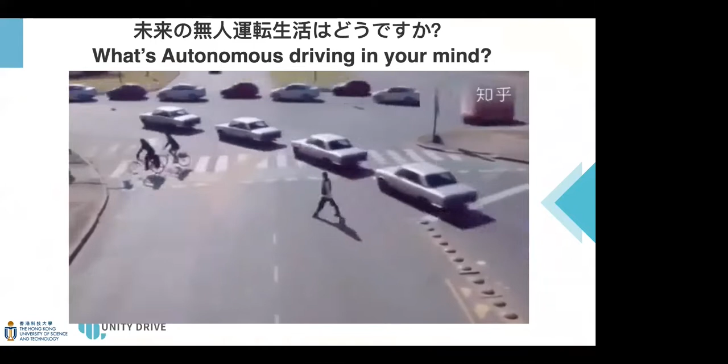When we talk about autonomous driving, basically everyone will have a kind of image or expectation of the future. It's definitely not something like a technical term, they will have an image, probably like the video we show here on the screen. The autonomous driving vehicles can coordinate with each other and everything moves totally safely, with no accidents, and all the planning and motion of the vehicles are well planned. So that's probably what you can expect, or what you want to imagine about the future life.

Our research on autonomous driving actually goes along with that direction. In the past 10 years, we have been working on the first autonomous car in Europe. We also worked on the first autonomous driving bus in China, and we developed the first autonomous driving vehicle in Hong Kong, as well as the first autonomous driving boat in Hong Kong.

Nowadays we found that autonomous logistics would be one of the main driving forces before the so-called L4 level, meaning the fully autonomous level of high-speed autonomous driving. There must be something else, which we call low-speed driving technology, that will be used mostly for last mile delivery, security and surveillance, and also warehouse usage. That's based on the large amount of needs and the increment of the requirement for logistics.

It has been reported by these big players, especially the e-commerce players, that in 3 to 5 years, every day probably it's like this Double 11 festival. This is very special in China - that's everybody will do some e-shopping on that day. Last year, the orders per day already went over 1 billion packages that need to be sent out.

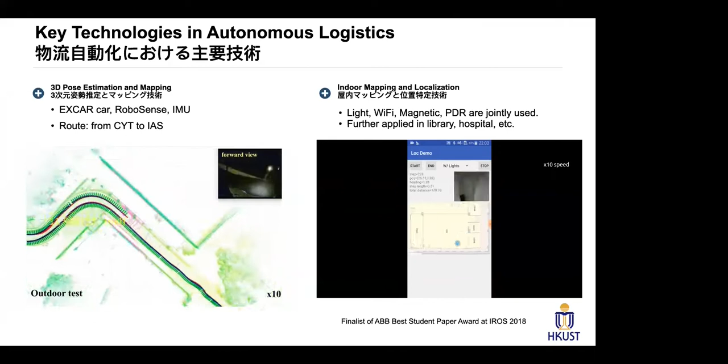That includes several aspects, including 3D pose estimation and mapping. That means the robot needs to know where it is, like an autonomous vehicle needs to know where it is - not only outdoor, but also indoor. We need indoor mapping and localization technology for package delivery logistics.

Also, we need to test the system in more realistic environments, including 3D mapping of more complex scenarios. So that means we need a bunch of engineering modules, including the data logging system and the human-machine interface, so-called HMI. Based on these, we develop the core modules for autonomous driving.

So I will give you several examples of the technology context. Firstly, from perception, we need to work on so-called 3D navigation, visual navigation, and real-time perception, so that you know how the 3D world looks like. Then the car can navigate around not only by LiDAR, but also by the camera system, and can detect obstacles in real time to see what happens in real life.

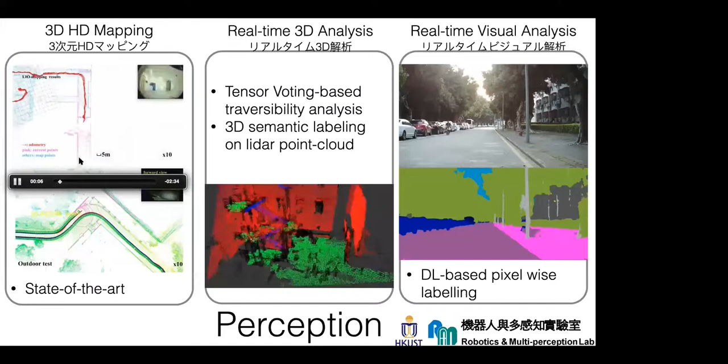We already got several awards along this direction in the past. More specifically, when we create this 3D map, we can even use some handheld device - we move around in the environment and it generates the 3D map on the fly in real time. Then we have 3D analysis of the environment, not only from LiDAR data but also from visual data, as shown on the right side.

Every picture will be converted - or we learn from the picture - so that every pixel is labeled with different semantic meanings. Finally, when the car is moving on the street or in confined areas, using both the camera and the LiDAR, we can have a better understanding of the environment.

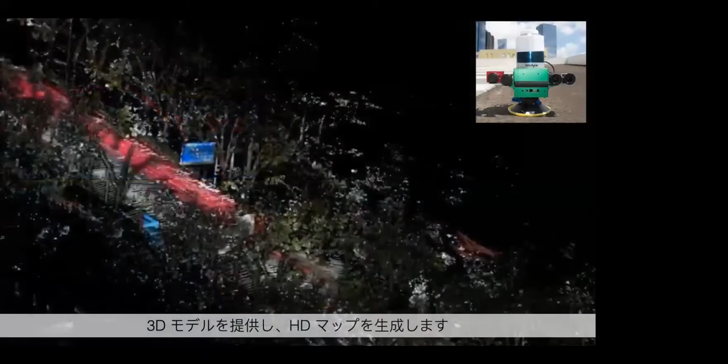Another thing is that we generate a 3D representation of the environment. So when we take this sensor set, shown top right, and put it on top of the car, and drive around a city area, it will construct a 3D representation of the environment in real time.

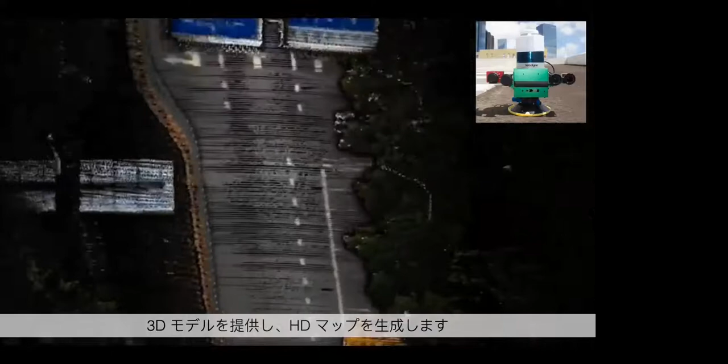In the video, you can see the 3D model we created, which can also serve not only autonomous driving but also smart city projects.

Because we have so much content, I will accelerate a little bit. So based on what we get from perception, we need to also work on decision making - that means knowing when to stop the car, when to accelerate, when to do a detour.

And we first test everything in a simulation. This simulation can simulate different kinds of weather, different seasons, different times of day. So in every experiment, we can change the background weather and other situations freely, so during one test, you can see cases where even we are on green lights and others are breaking red lights, and we can simulate such cases.

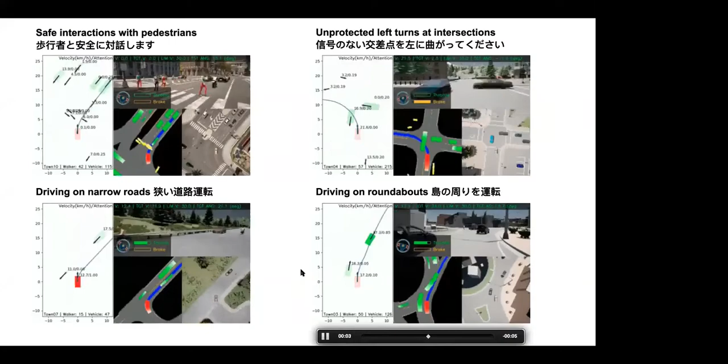For the planning and execution, I will skip this part, but we should know it's all supported by other sensors, as well as different computing units, and also supported by the car body design and construction. Here you can see that we also put testing environments in place.

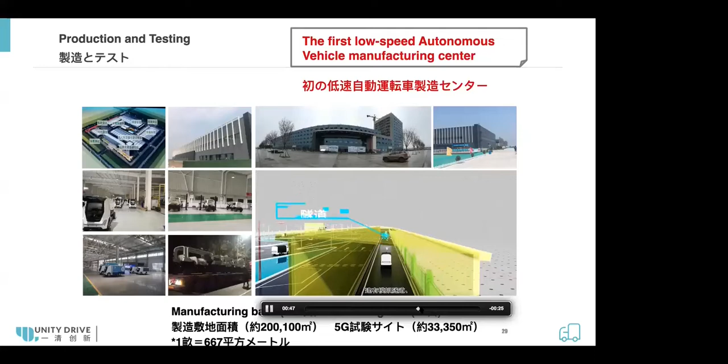We also construct testing environments so that we can do experiments under a 5G supported environment, so that we can handle the complexity of different special environments.

When we put this in use, there are several application domains. For example, this is a last mile delivery system. We collaborated with SF Express, so their postman can use a cell phone to call an autonomous driving car to help with last mile delivery. The car can be ordered to different dedicated locations and will come and wait, so when the postman gets the packages, they can directly put the package on the car, keep working with the customer, and all the delivery will be handled by this autonomous vehicle.

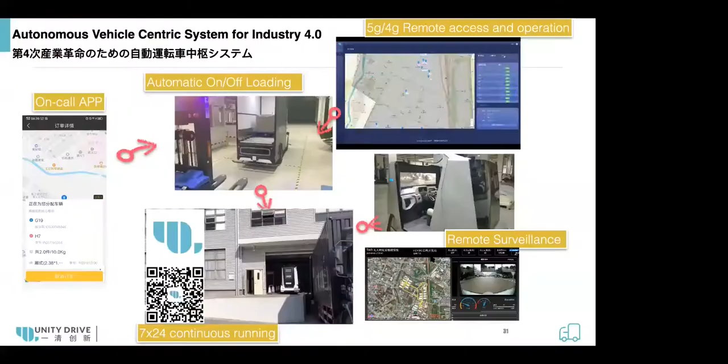And that's also helped the so-called fourth industrial revolution. We have an automated on-off loading system, a continuous running logistic system, and a remote surveillance system to connect with the ERP and WMS systems, etc.

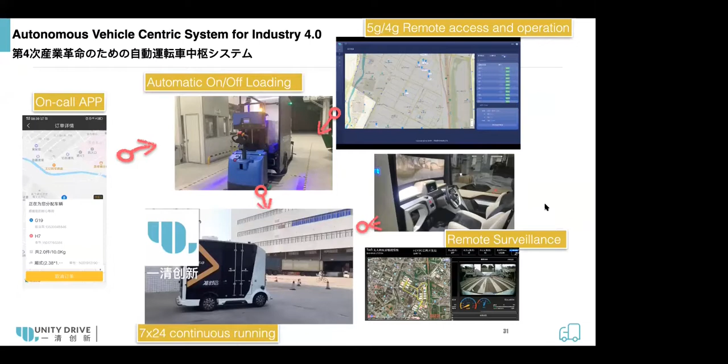And we have a sizing, you can call that a golf cart, and we have multiple vehicles collaborating so that it can serve the sightseeing purpose at different landscapes and locations.

And we can also use that for food and package last mile delivery. When we put an order in a park, the vehicle will help fetch the food and packages from the shop, and then it will deliver to the final customer. Everything will be handled by an autonomous car without any driver on board.

We have been testing this system over the past 3 years, especially for low-speed driving in different weather conditions, etc., with extended applications in different areas. Here is a list of vehicles we have been trying and working on.

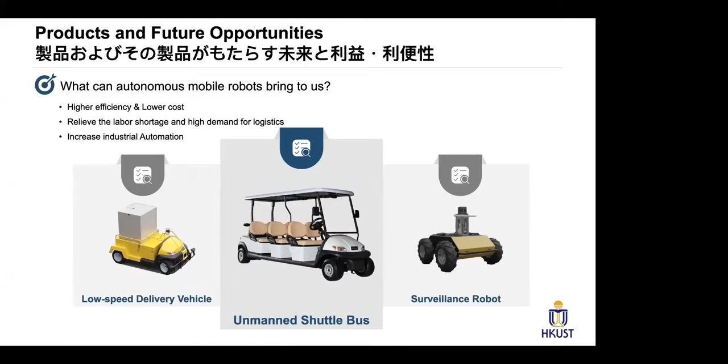Our last message is about products and future opportunities: the low-speed vehicle can actually facilitate our life a lot. That's what autonomous mobile robots can bring to us. But one consideration is the cost. From millions of US dollars cost to 100,000 Hong Kong dollars, we are almost there.

From that, HKUST, we are now establishing several sub-organizations to conduct this kind of research, ranging from the IADC, which I'm leading, to several spin-off companies like Unity Drive Innovation and LIC, etc.

So, here's the last page. At the beginning, we talked about the innovations of the future autonomous driving life, and when we really put the autonomous vehicle onto the working side, you can see that people are getting very curious about the car to see whether it will stop. This was around January 2019, when we first put the car onto the industrial park and everybody was quite curious. But by the end of 2019, everybody is quite used to this car just moving around without any driver on board. It takes some time for the whole society to accept that the autonomous system is really helping and the future is coming.

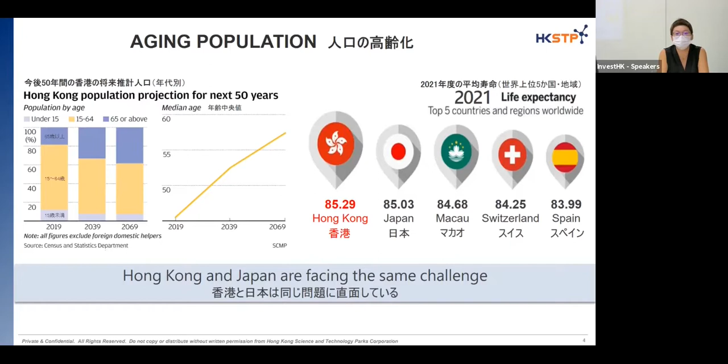The problem for us is that the workforce is decreasing. Right now it's about 1.12 million people over 60 in 2015, but by 2034 it will become 2.28 million, about 1/4 of the Hong Kong population. So we could easily foresee that most of the skillful workers are approaching retiring age soon.

So these are the driving forces and the key reasons why we need to bring up certain new technology such as automation and robotics.

Some case sharing - the logistics industry is still one of the key industries in Hong Kong. For the traditional operation, it is highly labor intensive, and we have lots of stationary machinery which requires skillful workers to operate. But the impact is that the whole process becomes inefficient and expensive, and it's not easy to scale up, relying heavily on the labor we could find in the market.

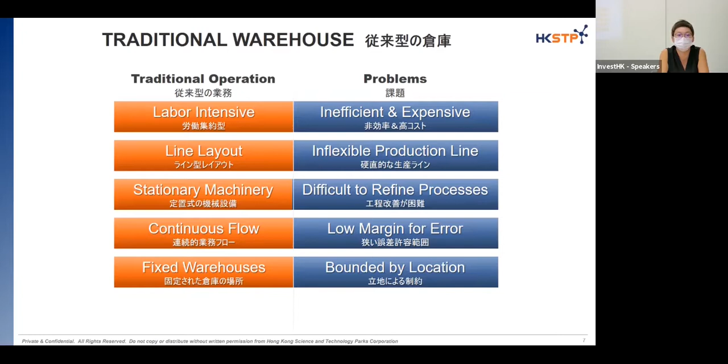Recently we have one good company from China called Geek+. This is one of the biggest logistics smart warehouse companies in China, working on a lot of different kinds of robotics to help automate warehouse solutions. The reason Geek+ would consider Hong Kong is because they would like to go out to the global market through Hong Kong as a stepping stone.

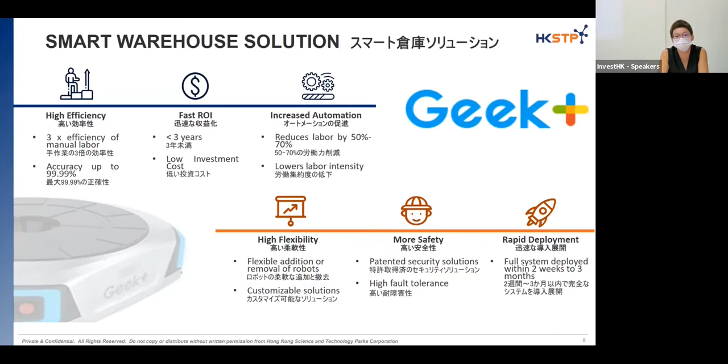In China it's easy to make a smart warehouse because space is usually not a big problem. But what about Hong Kong? Hong Kong is just like Japan - space is always a problem. So when developing new solutions in Hong Kong, they need to still provide high throughput while minimizing the scale and upgrading efficiency to help the industry.

So this is one example, helping build a warehouse for a convenience store in Hong Kong. You can see they have used a lot of different kinds of robots to build up the automatic warehouse for this convenience store. And in construction, it's even a more difficult situation, because in the construction industry most of the tasks need highly skillful workers.

You can see that Hong Kong has almost the most high-rise buildings in the world - right now it's already over 9,000 high-rise buildings. At the same time, labor costs keep increasing throughout the past 3 years, with a ratio increase of about 27%.

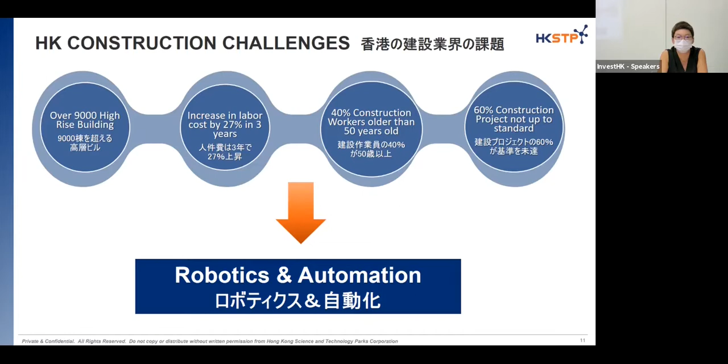This is why the construction industry is heavily looking into robotics and automation. So one homegrown example is this company called Respect. What they are doing is facade inspection using drones.

The reason they developed this automatic inspection technology is because for most high-rise buildings in Hong Kong, if they really want to do construction inspection, they need a lot of time and it's not that easy. That's why drones are one way to help us do inspection more frequently and more accurately.

This company is right now going quite well, and their projects are not only for commercial buildings, but also a lot of projects for the Hong Kong government.

Another aspect is how we could really downskill the workers' level, because if we could make manual work become semi-automatic, the skill set required for the workers could be easily diminished.

That's why the welding robot has come across these days, because what the workers have to do is just control or simply program a little bit for the welding robot. They don't really have to learn the whole welding process. So this is one way the construction industry is downskilling the skill set for workers right now.

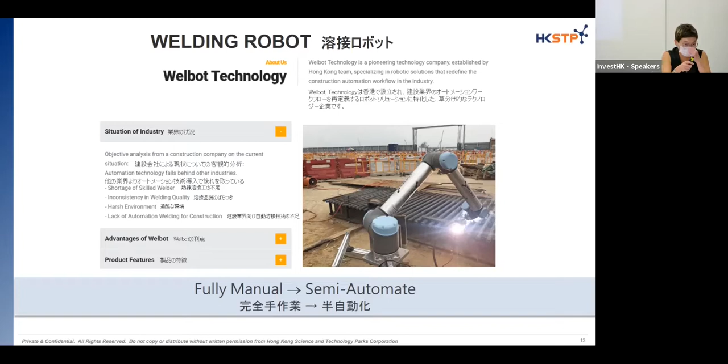So the final area that I would like to share is about smart manufacturing. When people think about Hong Kong, no one will think about manufacturing, but right now the Hong Kong government is pushing quite a lot for reindustrialization.

What they are supporting in this initiative is helping invest in a lot of capex, for example building construction as well as renovation of the factory, and also helping to create more value add to the production. We also encourage local consumption to provide a stable supply chain, and we got a lot of funding to support R&D activities within the reindustrialization initiative.

More importantly, we are not encouraging people to produce certain general products. We hope that manufacturing in Hong Kong is mainly focused on some high value add products and highly automated processes. I think one of the speakers today will further discuss the technology very soon.

What we got from Science Park is actually the facilities. So we are having several new industrial buildings coming up soon, and we will have a certain theme for all these buildings - for example, new material development and production, medical device or equipment, as well as electronics.

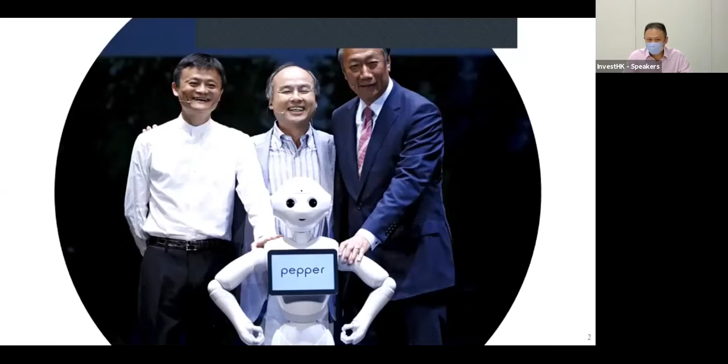I think most of you understand and have heard about SoftBank Robotics, but maybe you don't know about our investors or major shareholders. Of course, the chairman of SoftBank Group, Masayoshi, is one of the major shareholders, and there are two other major shareholders: Mr. Ma Yun, chairman of Alibaba Group, and Mr. Kok Tai Ming, chairman of the Foxconn Group. These three gentlemen share the dream to make robots help people with all the tough jobs in the future. That's why they formed SoftBank Robotics, starting from 2016.

Some products were launched to the market. The first one, on the right-hand side, is Pepper, which is a concierge product robot that can interact with humans. The middle one is NAO, which was majorly developed for STEM usage — probably in schools, you'll find many schools where NAO is used. And in 2019, we had our first surfacing robot, called Whiz, shown on the left-hand side. It is an autonomous vacuum cleaning robot.

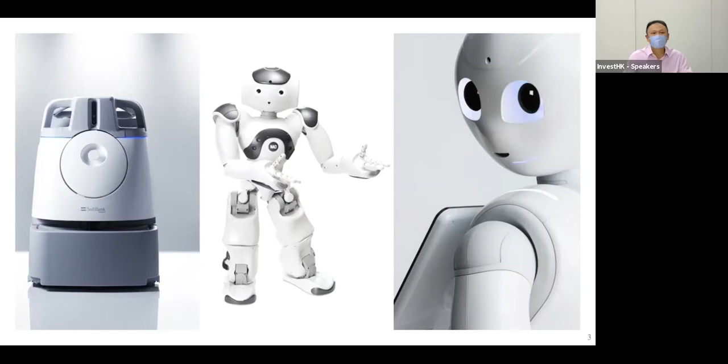As you may know, SoftBank Group has a vision fund, with so many portfolio companies invested in by it. SoftBank Robotics utilizes resources from the vision fund, since there are so many new technology companies, and we integrate that new technology to make our products. For Pepper and NAO, they aren't service robots, but we integrate navigation systems and cleaning systems. So the first integrated product, we wanted to launch it to the market as 'robot as a service,' and we did go-to-market efforts all over the world. Except for the cleaning industry, we're also targeting construction, food and beverage, office use, concierge, and cashier applications.

And starting from 2019, SoftBank Robotics expanded its network. We had a global footprint — not only Japan but also APAC, including the Hong Kong office, which I'm working in, as well as China, Korea, Singapore, and Australia. And of course, not only the APAC area, but also North America — we have an office in the United States, and we have offices in Europe as well. So starting from 2019, we were trying to launch robot as a service all over the world.

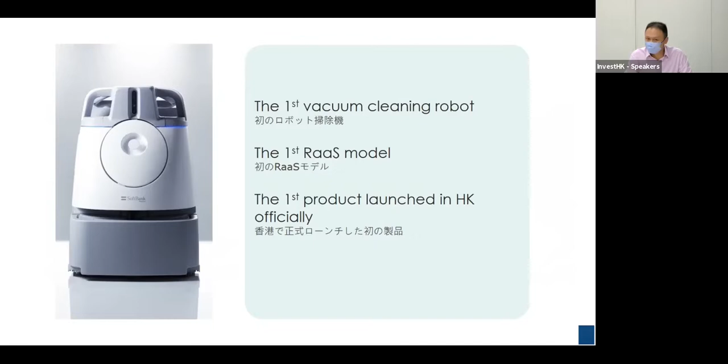I joined SoftBank Robotics Hong Kong in August of 2019, and we launched to the market at the end of 2019. In the first 3 months, we got a very good result.

At that moment, we launched the first vacuum cleaning robot and the first RAAS model, which we had never seen in Hong Kong before. We also achieved being the highest achieving sales office in the APAC region, ahead of offices like Singapore and Australia. So Hong Kong achieved the best results.

This is some photos and information about where we launched. For example, this is a benchmark case in Hong Kong International Airport. Our first customer, and actually our first airport customer all over the world, is Hong Kong International Airport.

They were willing to adopt new technologies. At that moment, COVID-19 had just started, and they were happy to deploy the robot into the airport, like the waiting area and check-in areas.

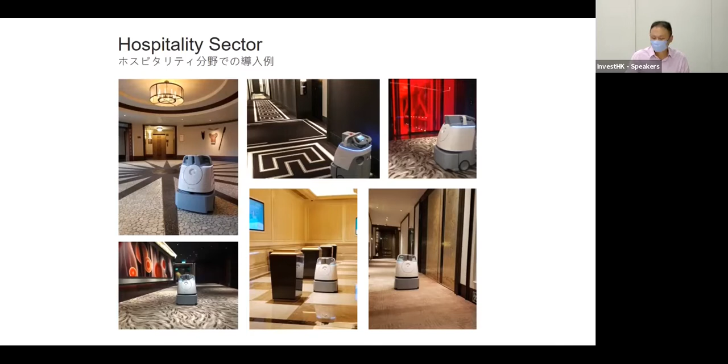In Hong Kong, we also deployed the robot into different shopping malls and office lobbies. Of the largest shopping malls in Hong Kong, there were around 40 to 50, and probably a third or half of them already adopted the robot and showed it to the public, usually placed at the entrance of each shopping mall.

For other public areas like medical clinic floors, MTR exits, and Chinese restaurants, there's a very lovely story because at a wedding ceremony dinner, the visitors or guests operated the vacuum cleaning robot themselves. And of course, we also deployed at MTR stations.

So we did a very good job at that moment, around March and April of 2020 last year. Our customers and clients were happy to show that they used the robot, and they posted all the news photos of the robot onto their social media pages.

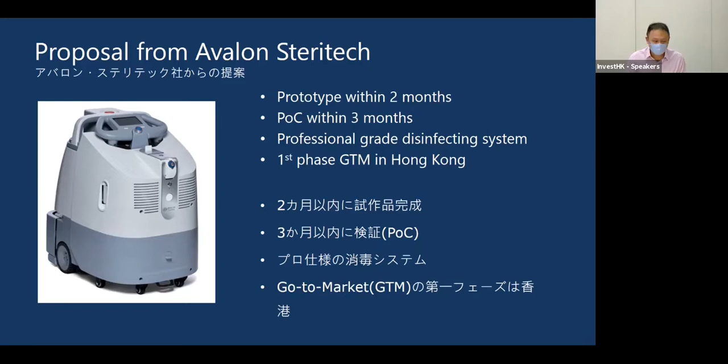So lastly, I would like to share why we chose to cooperate with a Hong Kong company. The first reason is very fast response time. When we had a lot of internal discussion about what kind of feature or module we had to add to make the disinfection features happen, finally our company, even though we didn't invest any money in them, they made a prototype for us and showed it to potential customers as well.

Second, for such a product, not only do we have to make it fast, but we also have to find production partners, because whenever it goes to market, there will be a very large scale, so production is very important. This company cooperates with a Chinese manufacturer, which is also a Hong Kong company, and they make the product very good and ready to go to market. It's also convenient because in Hong Kong we can easily find hotels and office buildings to do the POC.

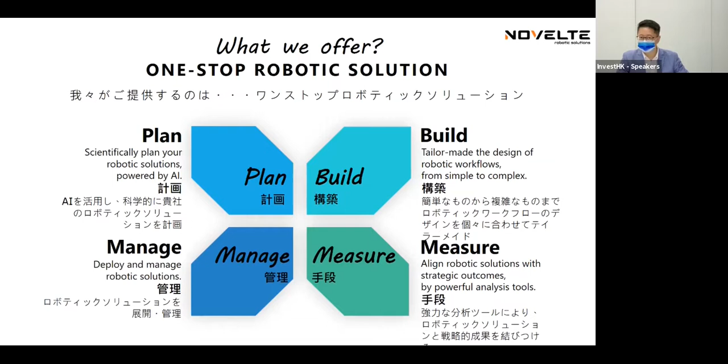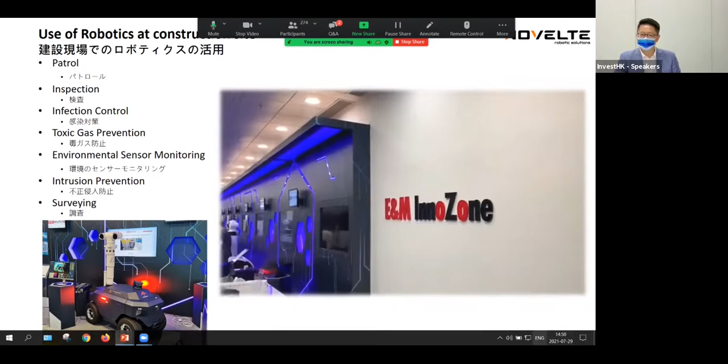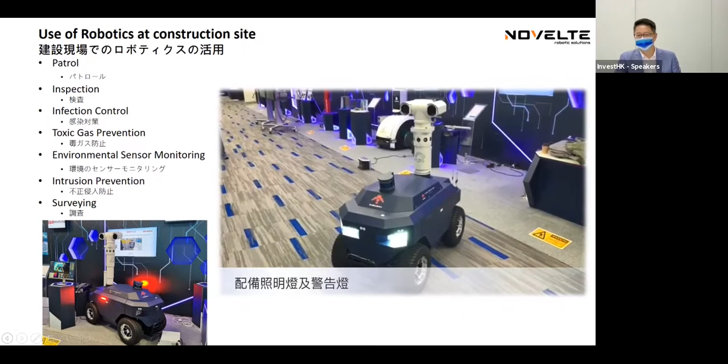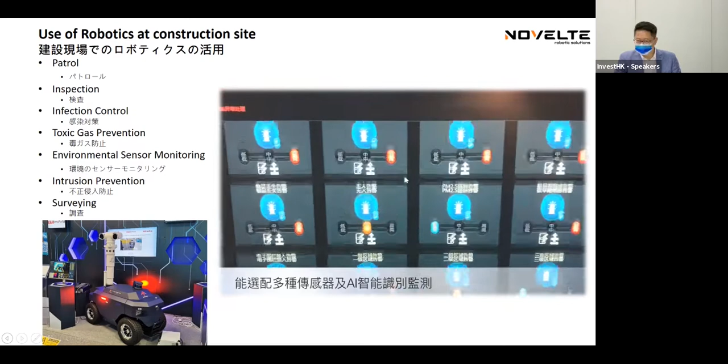So this is a project we work with EMSD, which is also a government bureau, on how to promote robotics in construction. We have been the deployment company for how to put a robot, like a tank or rather like a Jeep or SUV, into construction areas. From the screen, you can see a lot of sensors built inside this robot that can check toxicity, temperature, and any kind of sensor you want to add. With two big eyes on top, you'll see thermal images, as well as a high definition camera over 5G, and other ways of transmitting these images.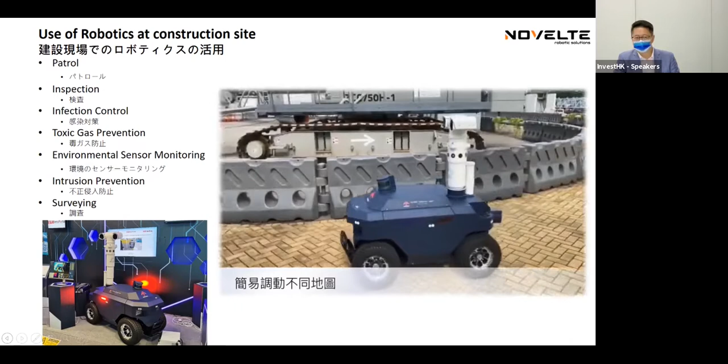So this is being deployed in a construction academy in Hong Kong. We call it the CIC Academy, where they help teach all these construction professionals. So this is something being used in the academy, but also in actual construction.

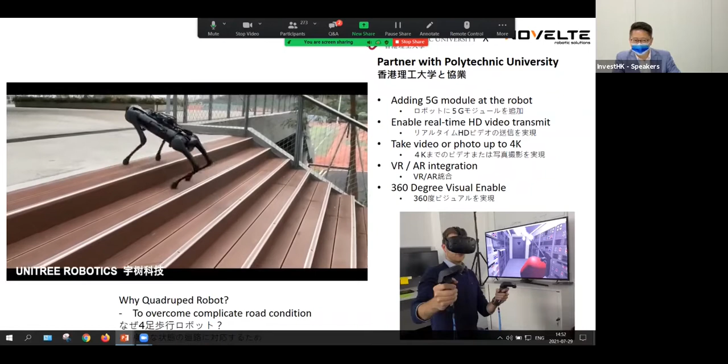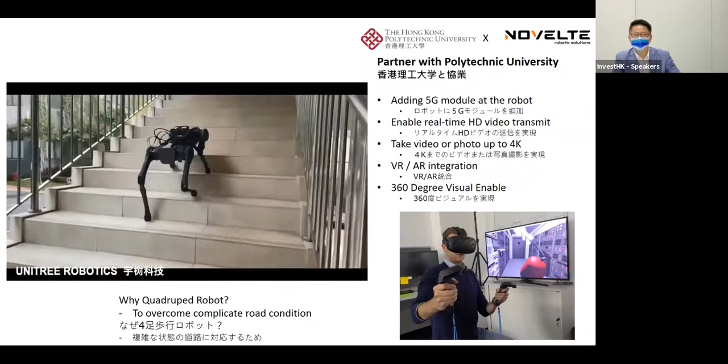What I'm sharing also today is quadruped robots in construction sites. This kind of robot is built without wheels, but with actual legs, so it can overcome staircases or irregular road conditions that are very common on construction sites. It looks similar to many other quadruped robots in that it can bear a lot of different working conditions, and on top of it we can mount a VR camera, 5G router, sensors, and all these kinds of things.

We are currently the partner working with Polytechnic University in Hong Kong, making the first robot that uses this space for an inspection scenario in construction sites.

We see a lot of similar adoption of this kind of robot base in the US as well as in Europe, and many of these utilizations are for patrolling, inspection, and surveying, which is also very common in terms of a construction site.

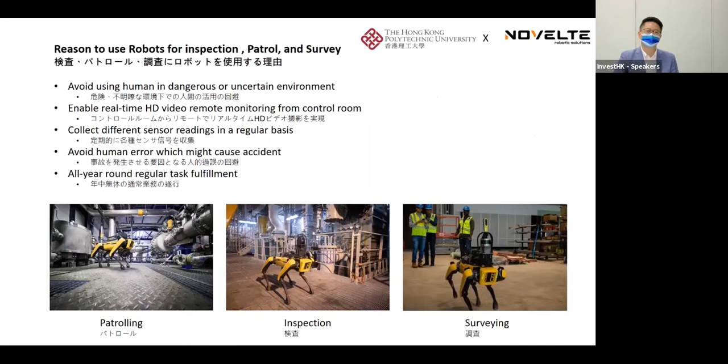Thirdly, we also have disinfection robots being deployed across construction areas, making sure that our combat against COVID-19 is well prepared.

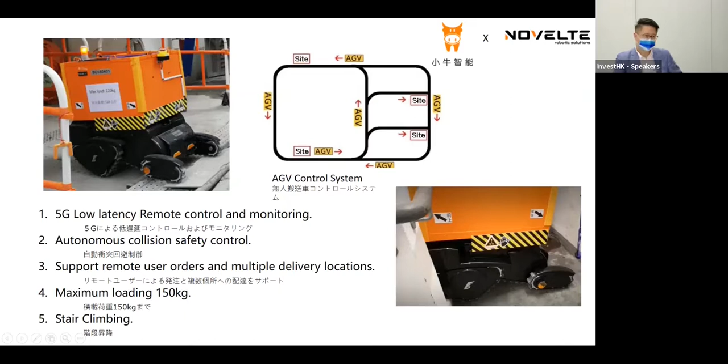Another thing is that we are also working with another science park robotic company, NEO Robotics, on a magnificent project delivering heavy rocks and bricks across difficult working conditions like staircases. So while the dog is doing inspection, we also need tools to help construction workers move around with heavy construction material. With the adoption of such a robot, it can lift up to 120 kg across this kind of stair climbing, well, 150 actually. We are also adopting 5G remote control and monitoring so the robot can be controlled remotely.

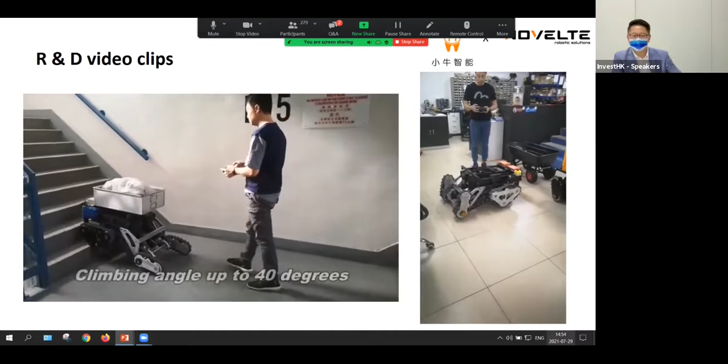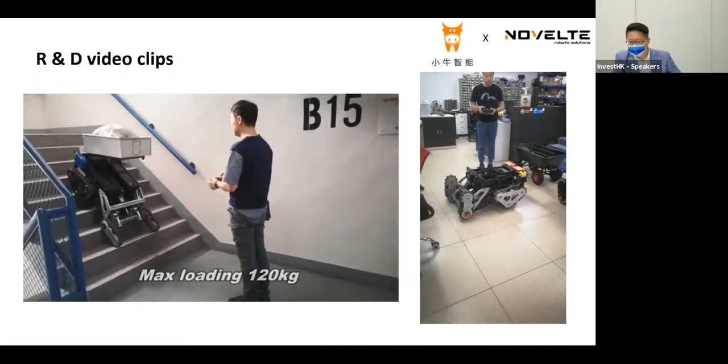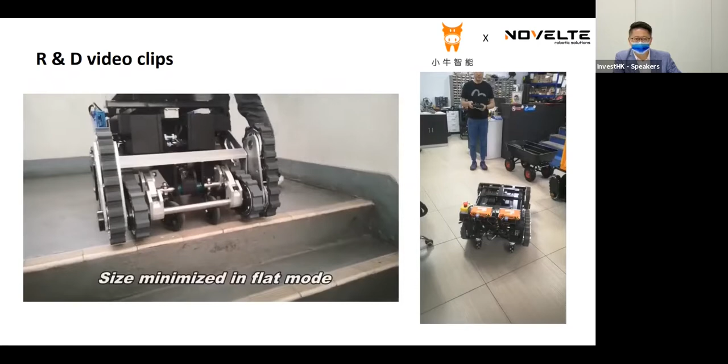And this is how we do it for COVID in Hong Kong. You can see the robot itself has a different conveyor-style design that can climb up and down staircases. More importantly, you can see the cabin on top is actually balanced out while carrying the load upon the staircase, so it will not fall out, which is very important for safety concerns. You can see the design is very innovative, with actually 4 conveyors in between, and it can turn in very condensed areas.

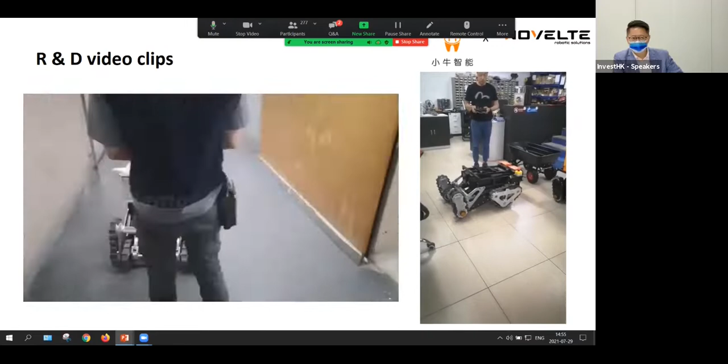As you know, staircases are very narrow, and you need a very robust moving capability. Remote control is already realized in our R&D, and secondly it can also do an emergency stop when it encounters a human being, so you can see the sensor is very sensitive. In construction, not only holding heavy things, but also safety is something we look into.

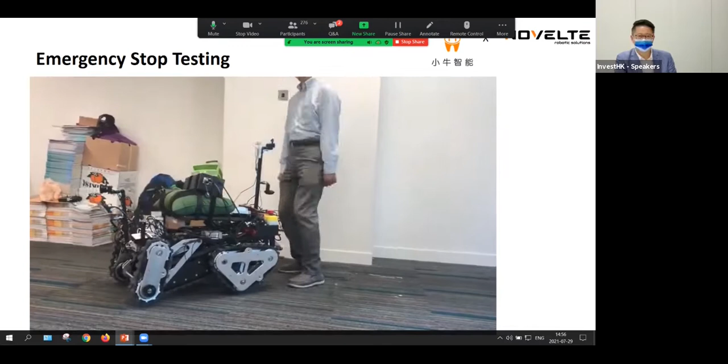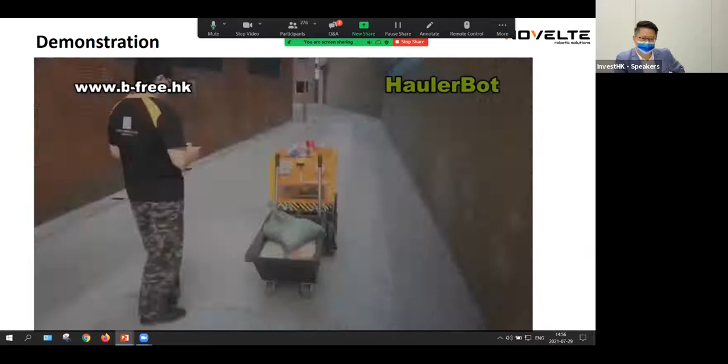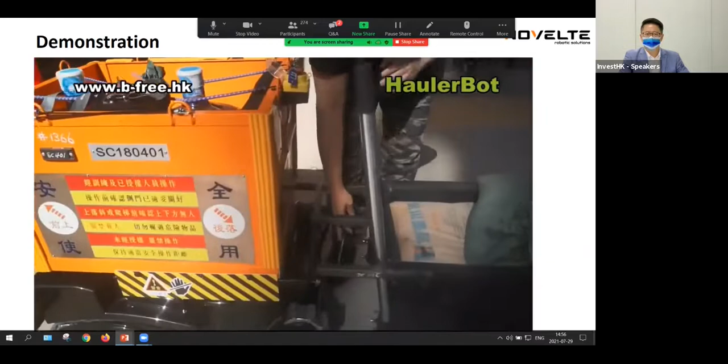On the next slide, you'll see we have a site demonstration. We can load a lot of heavy sandbags, sand, rock, and brick, and then just walk in front of it, leaving hands free for moving all these construction materials up and down. This is actually taking place on an actual construction site, and it helped our construction workers move heavy loaded materials up and down the stairs without an elevator.

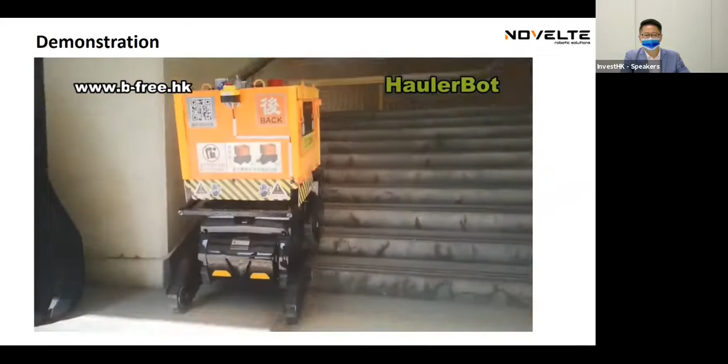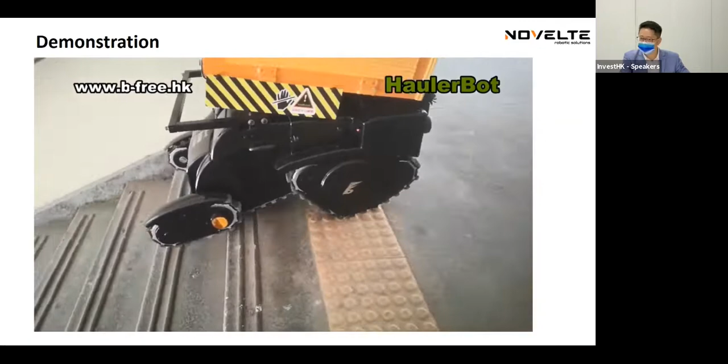Currently, this is also one of the first 5G projects used in construction in Hong Kong, because it has been submitted for the Hong Kong 5G subsidy program offered by the Hong Kong government to promote 5G. If successful, this could be widely adopted across all construction, not only in buildings but in this kind of construction as well.

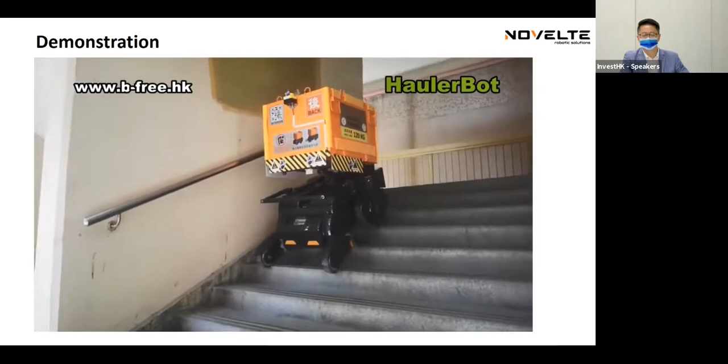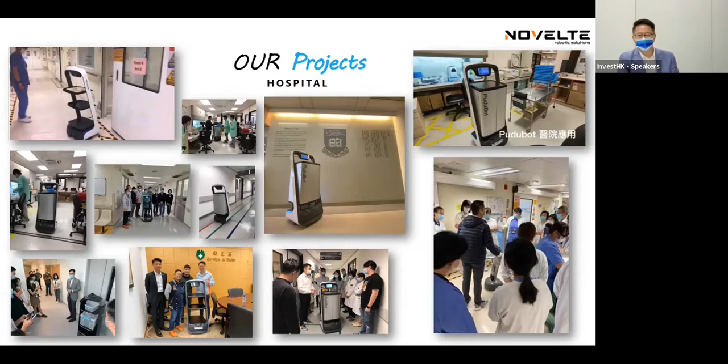Above all these kinds of projects that we have done, the adoption in Hong Kong over robotics has been very, very fast for the past 24 months, especially over the COVID-19 period. We find that there have been a lot of works not suitable for human contact, which could not be realized before COVID. We can see that it's not only in the healthcare sector that we have projects helping out our frontline colleagues, but also in the public sector, how to do it in a more efficient, safe and secure way.

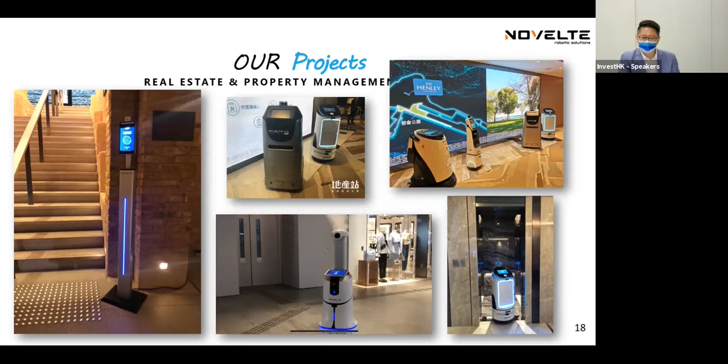And just like in Hong Kong, we have a lot of engineers and services support that can help adoption being smooth. And even if the technology is actually from across the border, from Japan or Europe or any other countries, we have the capability to make sure our clients have the localization capability as well as the software development capability.

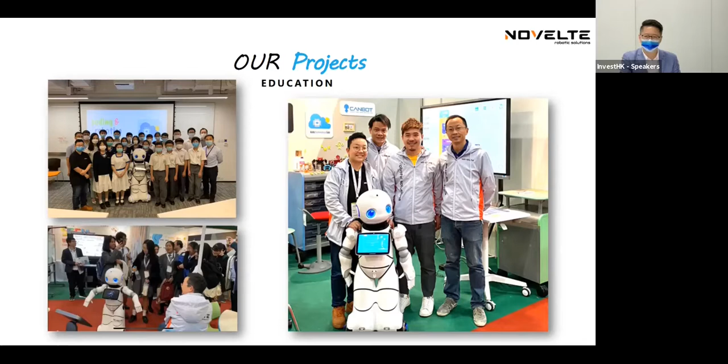These are some of the projects we adopt, not only in the public sector, but also in the commercial sector like restaurants and hotels. And I believe education is also one of the important sectors where we can work across countries on adoption, on how to use STEM or making sure our new generation has robotics capability. That's why in Hong Kong there are so many enterprises eager to adopt robots. I think cross-border technology can always bring more value to us.

Last but not the least, you are welcome if you have the chance to come to our office in Science Park. I think you will find a lot more technology and fun things here. Thank you.

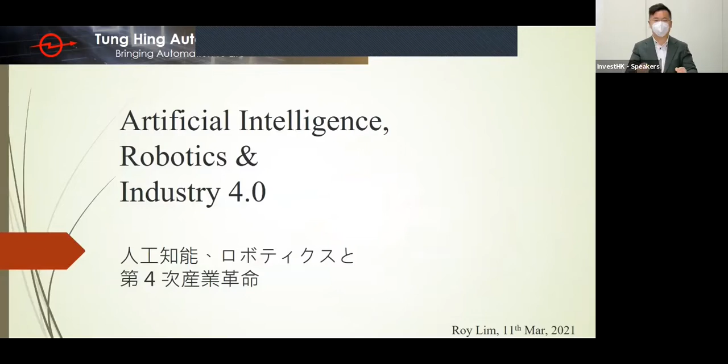Thank you. Hello everyone. Our company is called Tung Hing Automation. As the name suggests, it's an automation company, and our clients involved are mostly factories in China, like Foxconn or Tesla. It's all these robotic arms that you can imagine moving things around and using servo motors to convey products from side to side.

We have worked with Mitsubishi for 42 years, and now we are globally the largest distributor of their products. Let's talk a little bit about how we can use the daily heard AI, robotics, IoT, all these kinds of jargon. How can we use them in a factory so that we are bringing these factories finally to Hong Kong?

As you can see here, we are talking about invention. Invention is something that is new, that is AI, that is robotics. On the very other end of it is implementation. Where can we find the most amount of implementation? It is definitely in a factory. So in between, we want to build a bridge, which is how to use AI and robotics and put them into actual use.

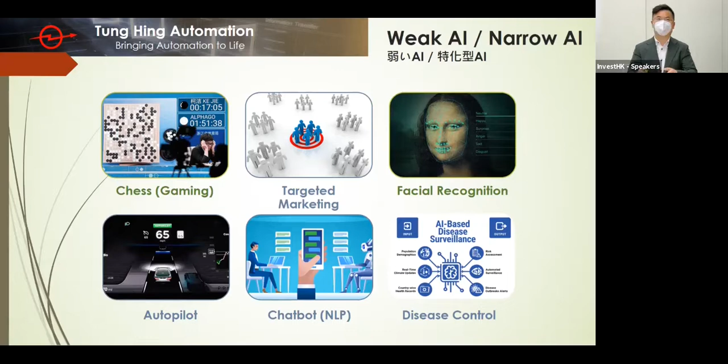So what are AIs? What can we use in the factories? We have facial recognition, search algorithms, targeted marketing, autopilot technology as we've seen a lot today, chatbots, and even big data analysis for disease control, which was very important in the last year. We are also talking about deep AI, strong AI that can learn itself to adapt to your environment.

Here is an example. We used to build some automatic lines for factories building watches. They might use a CNC machine to build the watch, but at the end of that line, they have to polish the watch. So you need to bring that watch onto a 2000 RPM wheel. And that wheel is actually very fast.

So if you slip, it will just fly out, hit your forehead, and you die immediately. Or while you are polishing, there are actually a lot of dust particles coming out. If the concentration of this dust gets to a certain level, the entire factory might explode.

So all these problems we have automated into one robotics facility. First, we use robots to polish the entire stuff. Then we put these watches onto a very high resolution camera. By learning what is a good product and what is a bad product, we can finally automate the entire inspection, so no workers need to be watching closely every day.

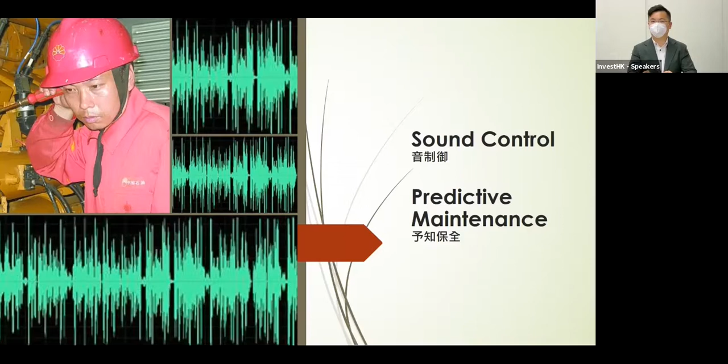Of course, if we are talking about manufacturing, there is music and manufacturing as well. It's quite amazing how AI can be composing music themselves. But of course, AI always follows rules. So what we are doing is we are building it to do repetitive stuff. We are asking it to learn from our rules. And it cannot compose like Beethoven. It cannot draw a picture. It cannot write stories. Okay, so with these kinds of tools, let's move a little bit on to robotics.

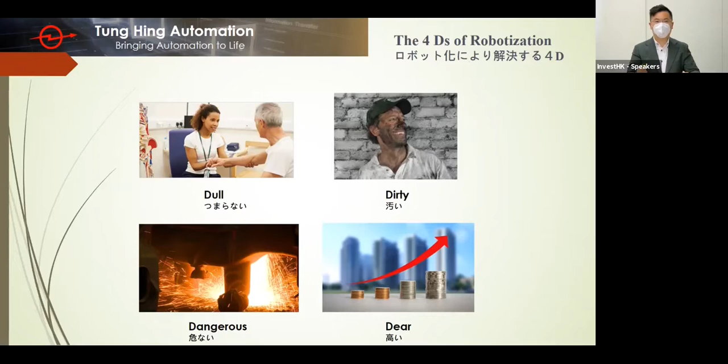Now we have all these algorithms. We have written programs. Now we are actually affecting the world. How do we do that? We replace all these dirty, dull, dangerous, dear, problematic work with robots. It will just keep working day by day, and then it can remove all the unnecessary human work. For example, in Shanghai...

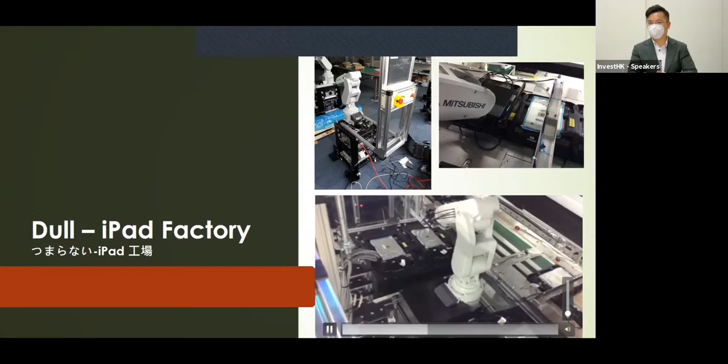And as you can see, this is all the robot is doing, moving the iPad onto the conveyor belt, move it onto the test station, back and forth. They used to hire a lot of workers just to do this. It's very boring, it's meaningless. We should be replacing these.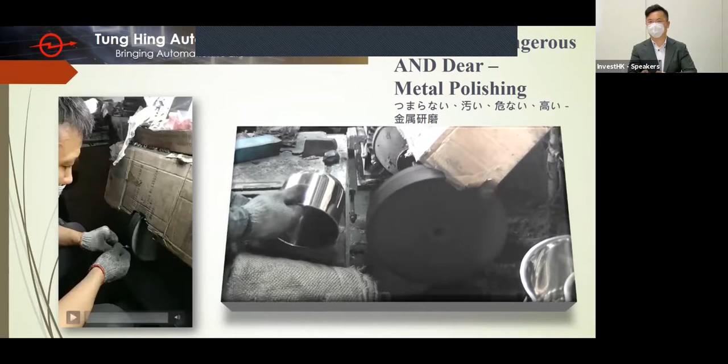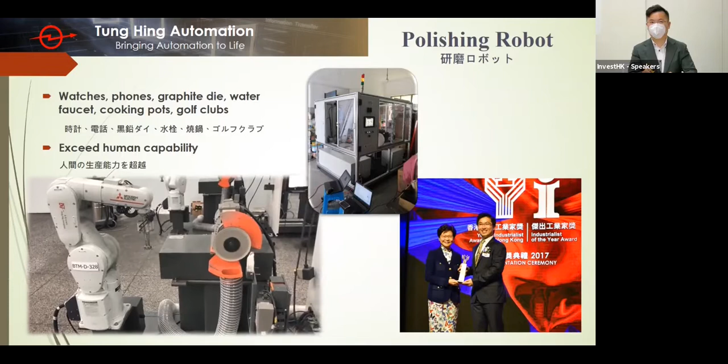And as we talked about, this is how you polish now in 2021. This is still the real factory, what you're looking at. So we are quickly replacing all these factories by this machine. We are actually removing dangerous work. We are making even better products than humans.

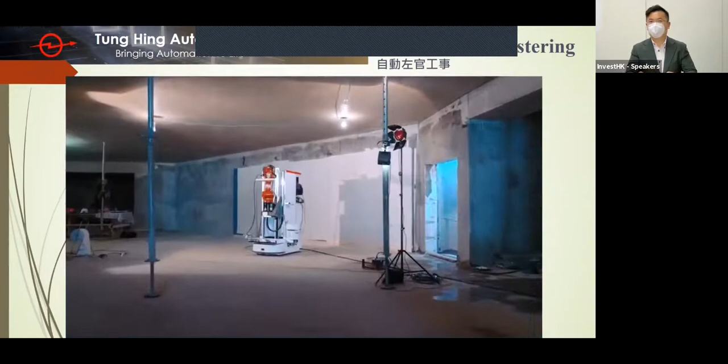A lot of robots actually can do things that are beyond what we imagine. Of course, you can paint, you can plaster, you can do a lot of automatic work in a building.

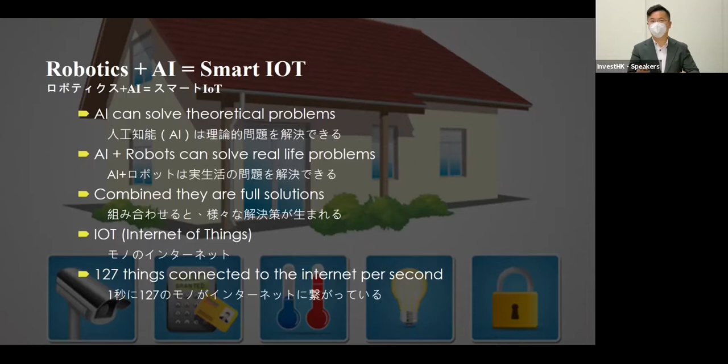And then now we also want these robots to know about the environment. So how do we do that? We are spending a lot of time finding sensors so that the robots and all these algorithms that we wrote can actually do something meaningful. So first of all, we use vision. So an inspection rover is always used. We take a high resolution camera, we move it around in an area, we read the text, we read the meters, and then we interpret all this data into a digitalized form, and then we upload it into the cloud. Now we have a lot of analog data which we could not interpret in the computer before. Now, how do we use these?

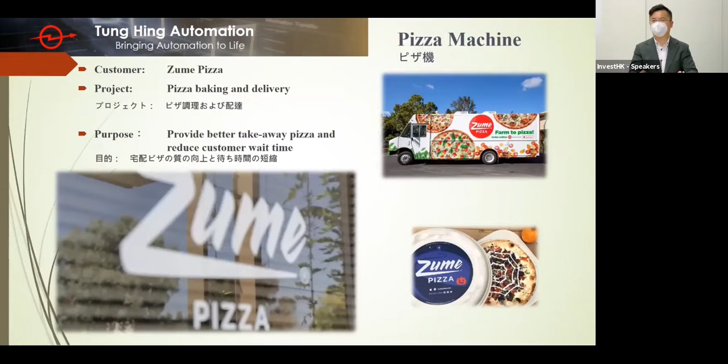For example, here we are looking at the pizza machine. It is just making pizza with robots, and it is cooking it, it is putting the ketchup on it. Very simple technology. But at the end of the pizza manufacturing, we are actually putting the pizza into an oven. And the ovens are all on the truck. There are 50 ovens in one truck, and this truck will deliver it directly to the customers. And 6 minutes before the truck arrives, which is determined by GPS, we will turn on the oven so that the pizza is crispy and hot. So these are some very tiny pieces of information that we can obtain from our environment that make the entire process completely different and better.

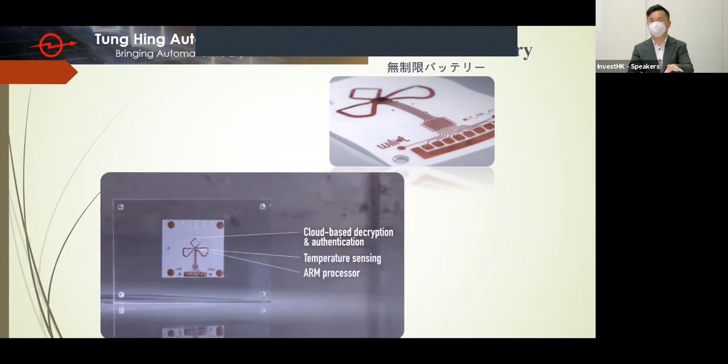Let's look at a few more very magical sensors that we are looking at. Wiliot, it's a completely wireless, limitless battery sensor. It can sense temperature, it can sense humidity, whatever you put on it, but it is taking energy from the Wi-Fi signal. So all we need to do is put this onto a machine in a factory, and then it will just continuously work forever and ever. So we don't have to pull the wires, we don't have to install them. All we need is wireless technology. This has just received 200 million from SoftBank like 3 days ago.

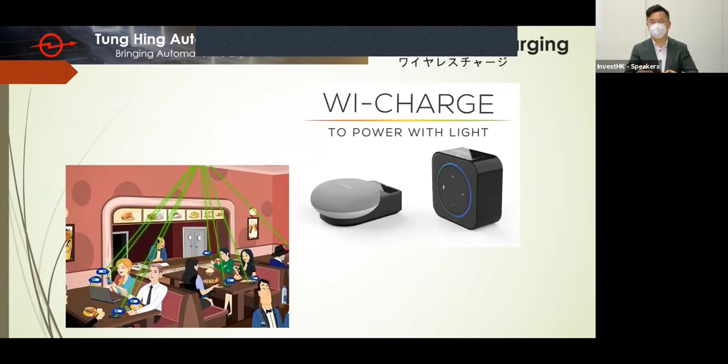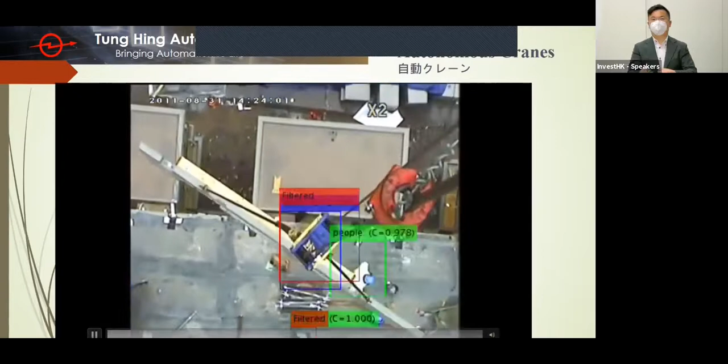And Wi-Charge? We are also talking about how we can transmit more energy wirelessly. With this, you can transmit power without a lot of power loss over a 10-meter distance. So this is also very important for a very big factory where we need to put sensors in a lot of places. Also, we are looking at autonomous cranes, which need a lot of information from visual cameras, we need sensors, we need weight data of the entire crane. So these are examples where we need a lot of sensors.

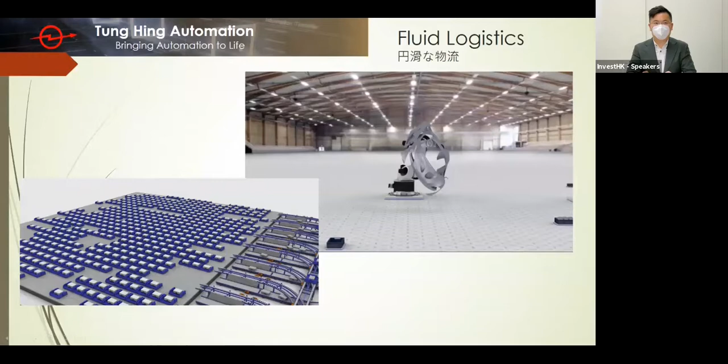And then we will play this video as well. We're looking at movable floors that are installed on the factory ground and will just move around all by themselves, magnetically. So this is the future of conveying. We are talking about 2D conveyors, not just one-dimensional anymore.

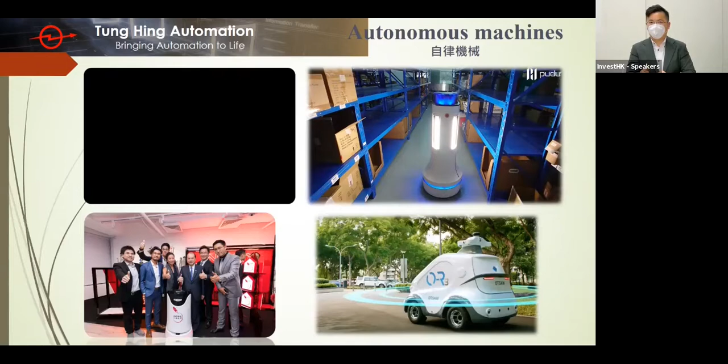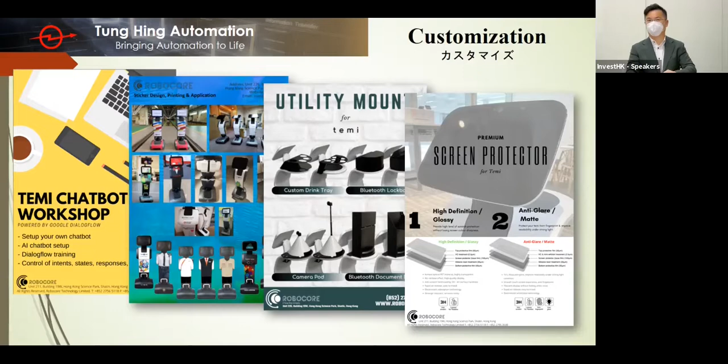So we have covered a lot of sensors, a lot of robots, and only by utilizing all this technology can we actually deploy the very complicated factories in Hong Kong, because there are so many labors, there are so many very tiny bits of stuff. If we put too many people into the factories, it's going to get dirty. So we really need to look at more sensors, more robots in order to actually get manufacturing back to reindustrialize Hong Kong.